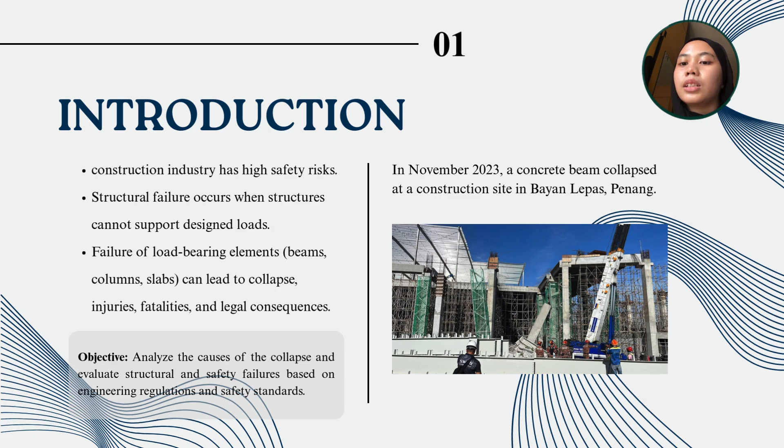regulation and safety standards. To really understand what went wrong in Bayan Lepas, we have to look at the scale of the failure. We are talking about a reinforced concrete beam that was 12 meters long and weighed a massive 14 to 33 tons. In any building, beams are the heavy lifters. They take the weight from the floors and walls and pass it down to the columns and foundation to keep everything balanced. So in this case, the load simply became too much for the beam, causing it to snap and collapse. So why did it happen?

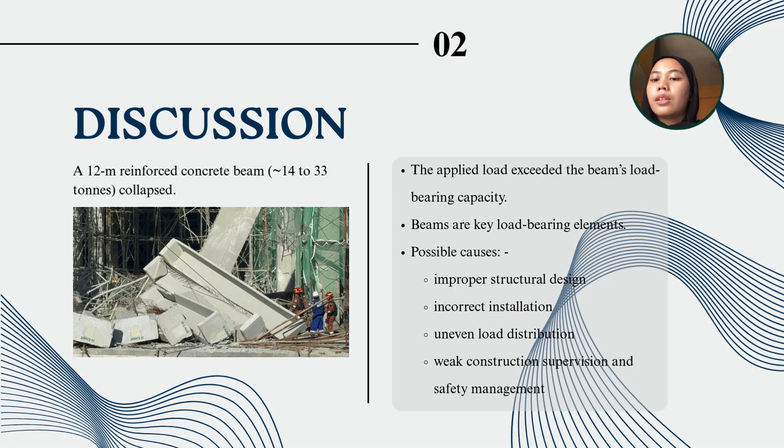It may be due to improper structural design that was overlooked or not taken into consideration. And it can also be due to incorrect installation as well as uneven load distribution that caused the beam to not be strong enough to bear the load. Not just that, it can be because of weak supervision or negligence in safety management that caused the building to collapse.

So I will talk about technical and engineering issues. The cause of collapse for this issue is failure of a 33-ton main support beam triggering collapse of 14 additional beams, and it is a chain reaction that indicates potential structural design flaws, construction errors, or both. The incident occurred while concrete was being poured on upper floors.

Next, we will talk about concrete and construction issues. Concrete reportedly hardened after 12 hours, but remained porous and not compact, and the standard curing time for cement is 7 to 28 days to reach designed strength. Early loading before sufficient compressive strength can lead to structural failure. Night construction suggests schedule pressure and insufficient curing time.

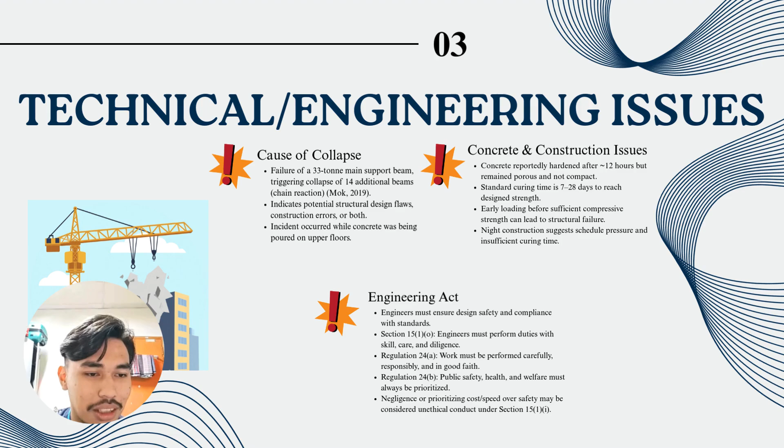So from the Engineering Act, engineers must ensure design safety and compliance with the standard. From Section 15(1)(o), engineers must perform duties with skill, care, and diligence. From Regulation 24A, work must be performed carefully, responsibly, and in good faith. And Regulation 24B, public safety, health, and welfare must always be prioritized. Negligence or prioritizing cost or speed over safety may be considered unethical conduct under Section 15(1)(i).

Next, I will present the ethical issues that could lead to the problems in this case. The first one is the lack of responsibility in the duty of care. The second one is prioritizing cost and deadline over safety. The third one is poor risk assessment, and the fourth one is weak enforcement and compliance issues.

The first one is the lack of responsibility in the duty of care. This is the violation of an ethical principle where the contractor and engineers have a moral duty to protect worker and public safety. For example, in this case, 3 workmen were killed when a large 12-meter beam collapsed because the contractors neglected to check its stability before installing it.

The second one is prioritizing cost and deadline. This is the violation of the ethical principles of integrity and responsibility. The project completion may have been taken as a higher priority than worker safety, and the warehouse construction may have been hurried and materials or inspections skipped.

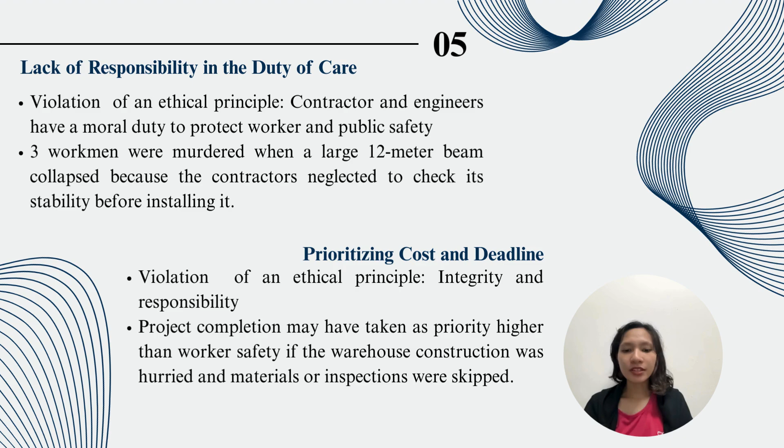The third one is poor risk assessment. This is the violation of the ethical principle of professional competence. The immediate failure of a large support beam during active construction shows that proper structural and load risk assessments were probably neglected. And the last one is weak enforcement and compliance issues, the violation of the ethical principle of accountability. The accident became worse due to the ongoing presence of a hazardous working environment.

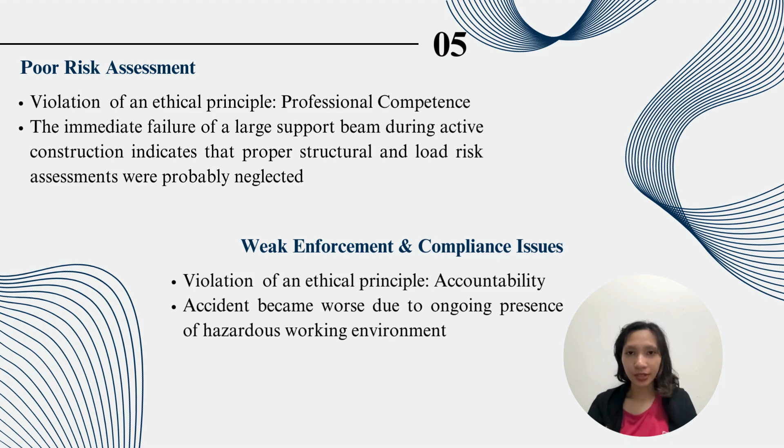Hello, I am Razi. I'll be explaining the recommendations to prevent incidents similar to the Penang warehouse collapse. So first, the structural design must be carefully checked before construction begins. Professional engineers should verify their design calculations and ensure the structure supports all loads, including construction loads. Using structural simulation software can also help detect weaknesses in the design early.

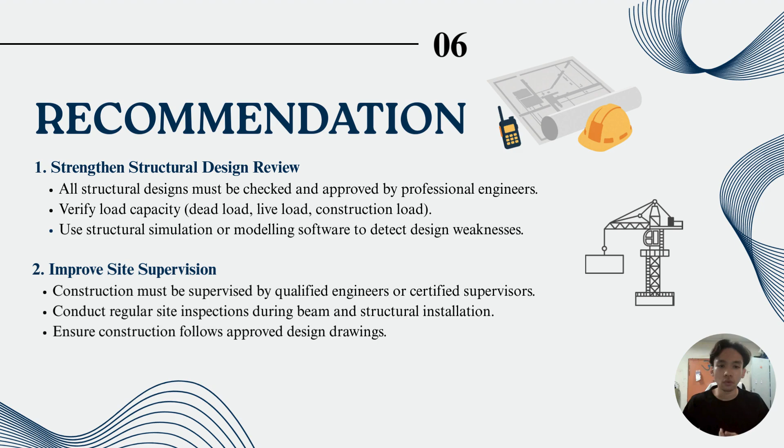And next, proper supervision on the construction site is very, very important. Qualified engineers or site supervisors should regularly monitor the installation of structural components such as beams and columns. This helps ensure that construction work follows the approved design and prevents installation mistakes.

Another important recommendation is conducting a proper risk assessment before starting construction work. Methods such as hazard identification, risk assessment, and risk control, or HIRARC, can help identify potential hazards like lifting heavy beams or structural instability. After identifying these risks, suitable control measures can be implemented.

During construction, the structure may not yet be fully stable. Therefore, temporary supports or bracing systems must be used to support structural components such as beams. These supports should be properly designed and inspected by engineers to prevent structural collapse during construction.

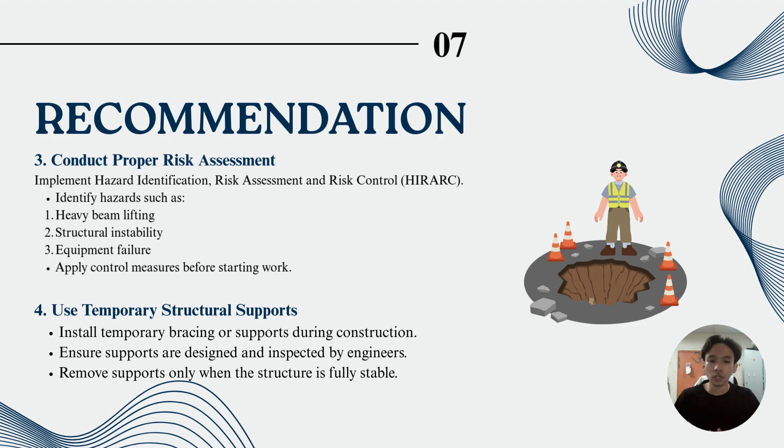In addition, workers should receive proper safety training before performing high-risk tasks. This includes training on hazard awareness, safe handling of materials, emergency response procedures, and the correct use of personal protective equipment. Authorities must also ensure strict enforcement of safety regulations such as the Occupational Safety and Health Act 1994 and the Factories and Machinery Act 1967. Regular inspection and strict penalties for safety violations can help ensure that construction companies follow proper safety standards.

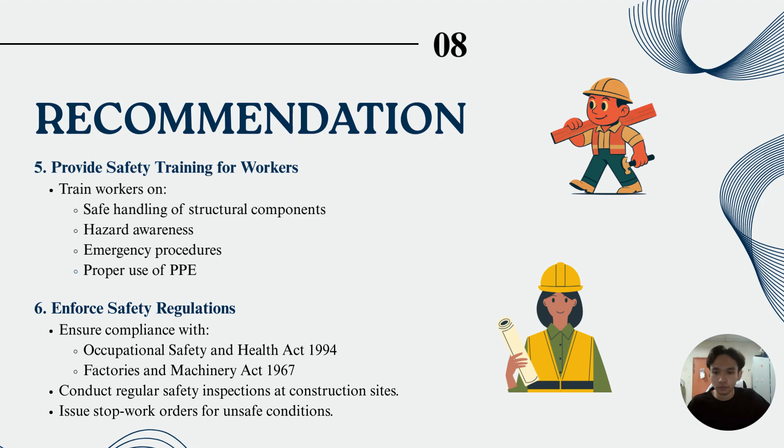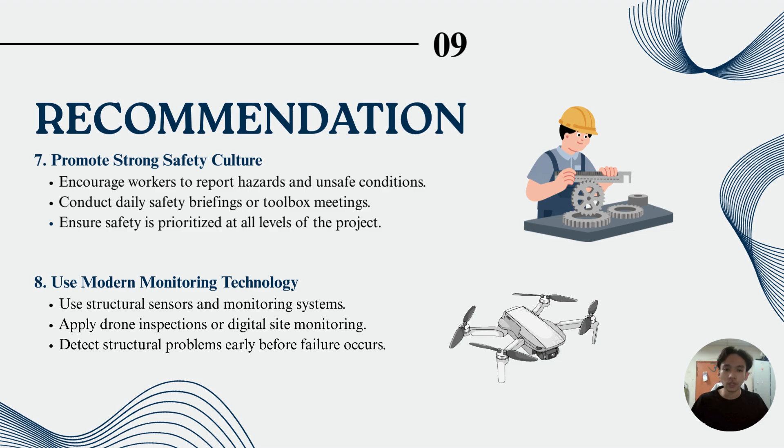Another important factor is promoting a strong safety culture at construction sites. Workers should feel comfortable reporting hazards or unsafe conditions. Regular safety meetings and open communication between workers and supervisors can help prevent accidents. Lastly, modern technologies such as structural sensors, digital monitoring systems, and drone inspections can help engineers detect early signs of structural problems. This allows preventive action to be taken before a serious failure occurs.

This incident is a wake-up call for the entire industry. Our analysis shows it wasn't just a material failure, but a systemic breakdown involving poor design, premature loading, and weak supervision. This highlights a clear failure to uphold the Registration of Engineers Act and OSHA 1994. Moving forward, public safety must always come before speed or cost. A building's integrity is only as strong as the oversight we provide during its construction.